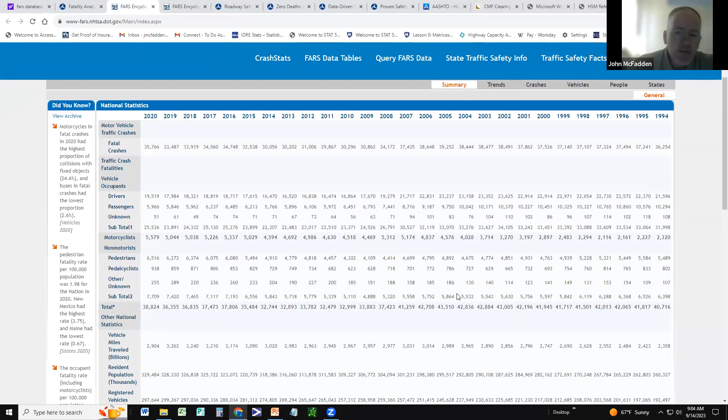Of particular interest here for me is what occurred in 2020. If you look, the first thing I'm highlighting here are the total number of fatal crashes, and then what's really more important are the total number of fatalities that resulted from those crashes.

So you'll see in 2020, highlighted there in blue, there were 38,824 deaths as a result of traffic crashes. The numbers themselves are astounding, and by definition, there's no acceptable number of fatals.

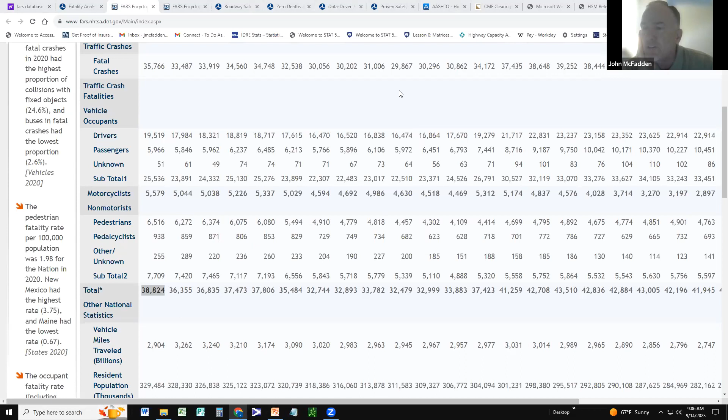But what really makes this discouraging is in 2020, as a result of COVID, the amount of VMT was drastically reduced. One of my thoughts as we were going through the COVID experience was, given that the country basically shut down, the world for that matter shut down, my expectation was we should have a drastic reduction in the number of deaths as a result of traffic crashes.

And yet what we saw was an actual increase from the prior year, 36,355 to 38,824. This led to and kind of accelerated the shift in how we deal with traffic safety, to deploy a new fundamental approach called the safe system approach, that I'll touch on as part of the presentation.

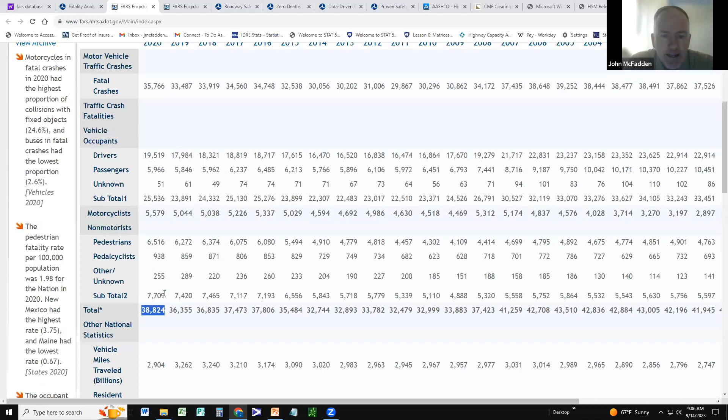But here are the national data, and you can track over the past 30 plus years. If you go back to, I remember back in 2010, 11, 12, after the financial collapse back in 2008, we saw a reduction in the number of fatals and reduction in exposure, that had me somewhat optimistic.

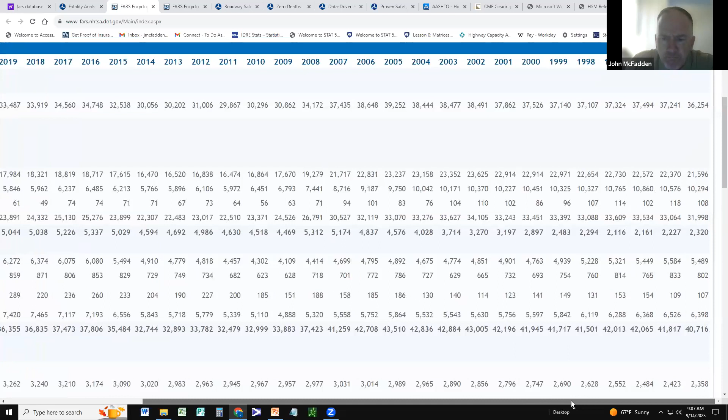We were seeing a reduction from 45,000 fatals, or I guess it was 43,510 back in 2005. We got down to 32,479 in 2011. And I've been with Fed Highway since 2001.

I felt like we were gaining momentum and having an impact on the reduction. But then what occurred was a slow migration back to the levels we were at prior. We haven't exceeded 40,000 yet, but it does represent an area of concern.

If we focus in on Florida specifically, you can go back to the FARS website, look under the states, click on the states, and you can find the Florida data. That's what led me to showing you this table.

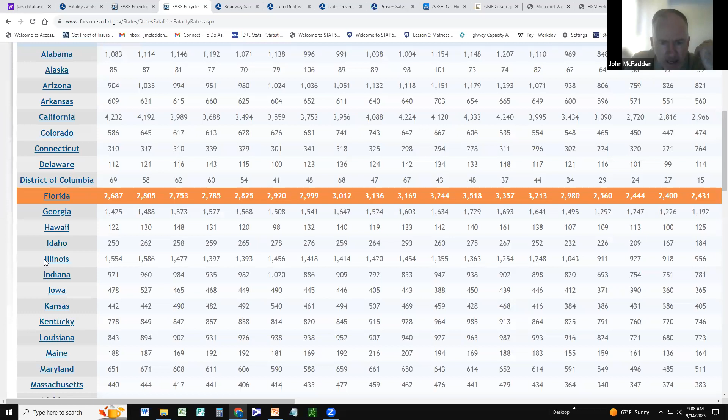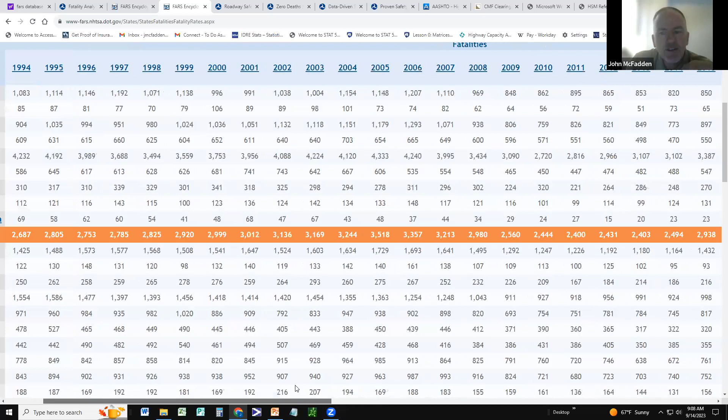You can see over the past 20, 30 years, going back as far as 1994, there were 2,687 fatals. In 2020, we're at 3,331 fatals.

So it feels like in Florida, on average each year, you're losing about 3,000 people as a result of traffic crashes. In past years, you can see Florida bottoming out in 2011 with 2,400. And then we saw the same movement as we've seen nationally.

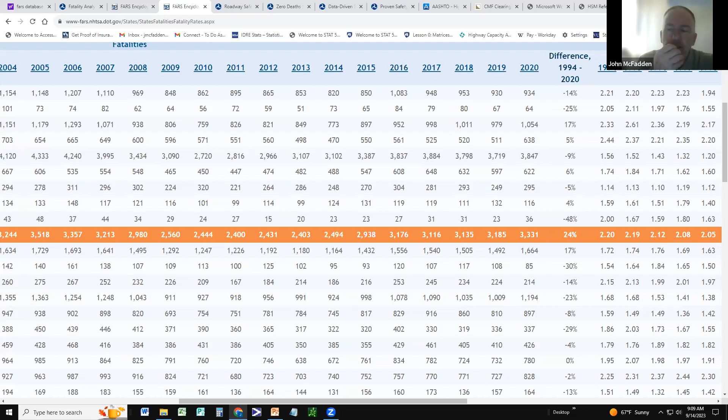With Fed Highway, I've gotten involved over the past 10 years in how to deploy data-driven tools to address this safety problem. That led me to want to share with you Federal Highway's data and analysis tool website. We have this site, the RSDP, our Roadway Safety Data Program, that provides a lot of information related to what we're going to cover today, tomorrow, and next Friday.

We do provide support related to deploying data-driven safety analysis. I was one of the co-leads for this Everyday Counts initiative, and as part of it, my role was to promote the deployment and use of data-driven analytics to help make more informed investment decisions about highway safety.

Within these sites, you'll see a bunch of different resources related to DDSA. I'm framing this before getting to the Highway Safety Manual, because the Highway Safety Manual is one tool that falls under the umbrella of data-driven safety analysis, and that's going to be the primary discussion topic over the next three lectures, today, tomorrow, and next Friday.

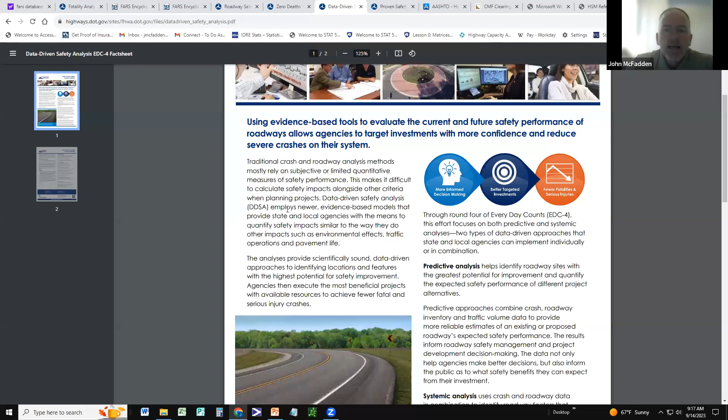And that finally leads me to the last website I wanted to share in the introductory part of this presentation, which reflects our proven safety countermeasures. These are different techniques that have been deployed and vetted, and the impact of these treatments has been quantified through typically crash modification factors that capture what impact installing or using these treatments or policy decisions will have in terms of the expected crashes reduced from the delivery of this.

You can see they're captured across different discipline areas: speed management, ped bikes, roadway departure, intersections, and then some cross-cutting countermeasures.

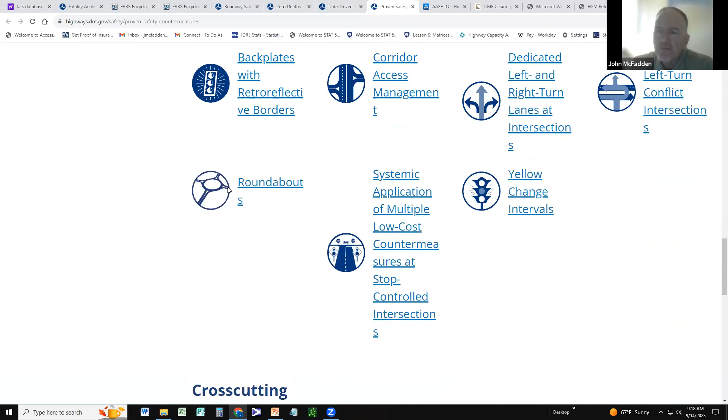The idea here is, given the fact that nationally we have limited resources within our jurisdictions, it's really incumbent upon us to make sure that when we select projects and designs or specific treatments for a project, we have a level of comfort with the expected return.

And that return is the number of crashes by severity that will be reduced given the investment that we have in each or any of these treatments that we would consider deploying. Without this knowledge, it's very difficult for us to be able to differentiate between what project and what design will yield the biggest return on investment.

It's not until the last 15 or so years where we have seen models developed that quantify the safety effects of design decisions, allowing us to now make comparisons across different designs to be able to select what combination of design and project yields the biggest expected return on our investment.

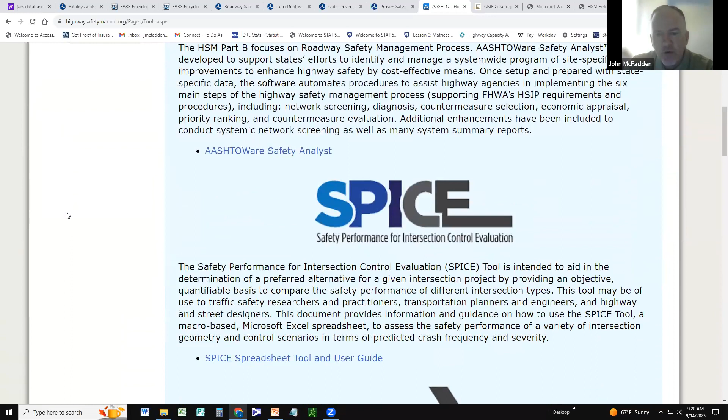The first major reference that you'll see I'll refer to throughout the day over the next 3 sessions is the highwaysafetymanual.org site. And within this site, you'll see under tools, there's a series of different software tools that are available for download that help us deploy these highway safety manual support software tools.

I'm going to focus on part C, the predictive methods, specifically these 4 Excel spreadsheets. For the purpose of today and as part of this workshop, we're focused on interchanges, freeways, ramps, and ramp junctions, which is the Enhanced Interchange Safety Analysis Tool, or ISAT-E, that I'll be using tomorrow to illustrate the content and application of this spreadsheet for data-driven safety analysis.

But I didn't want to move forward without mentioning that the HSM has the ability to predict crash frequencies for other facility types beyond freeways or full access control facilities. Specifically, you can do 2-lane rural highways, multi-lane rural highways, and urban/suburban roadways as well. The spreadsheets are all listed here.

You'll be getting an email from Taylor with a list of references to the specific research reports, whether NCHRP for the multi-lane rural, urban/suburban, and ISAT-E, or a Fed Highway report for 2-lane rural highways. That is the research behind what's in those spreadsheets, and it represents the chapters within the Highway Safety Manual.

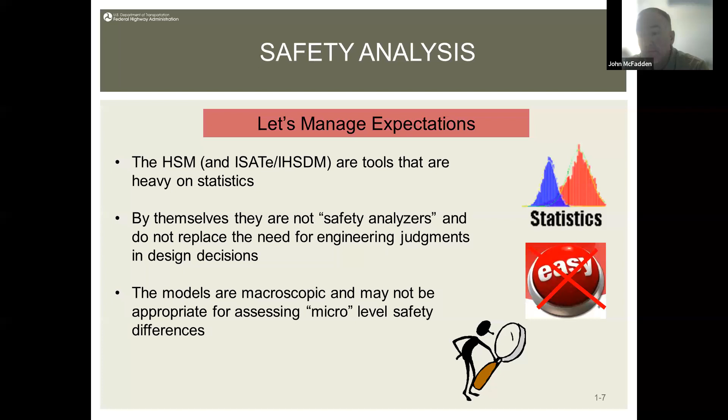Let me also suggest this: in November of 1985, a significant event occurred - the release of version 1.0 of Windows. It had a major shift in the impact it had on people's ability to use computers. Now, that first version wasn't an operating system, but it was more like a file share app before the apps that existed and as we currently know them. But it then evolved into a full operating system where everything is point and click.

I view that change in November of 1985, and the impact that's had on the computational world, similar to what we're dealing with in the safety community, specifically related to the release of the Highway Safety Manual in 2010. Namely, it changed the game with respect to how we analyze and deal with safety as it relates to our project development process, because we can now quantify expected safety benefits in terms of crashes reduced by type and severity for our projects.

In managing expectations with respect to this tool, I want to suggest that we are at version 1.0 of the Highway Safety Manual. The second edition is planned to be released within the next year and a half or so. Going back to the analogy of Windows in 1985, if I compare today's Windows 10 or 11 to that first version, you'd say these are two entirely different tools. I'd say the same about the Highway Safety Manual. Five to ten years from now, when we get to the second, third, and fourth edition, it will evolve and become more accurate and precise in quantifying the relationships between crash risk and design elements. The tool isn't perfect, but today it's the best model we have to explain the variability of crashes as a function of traffic volume and geometric design elements.

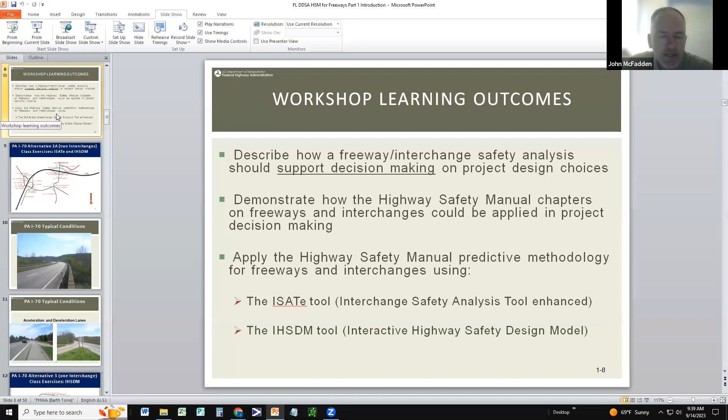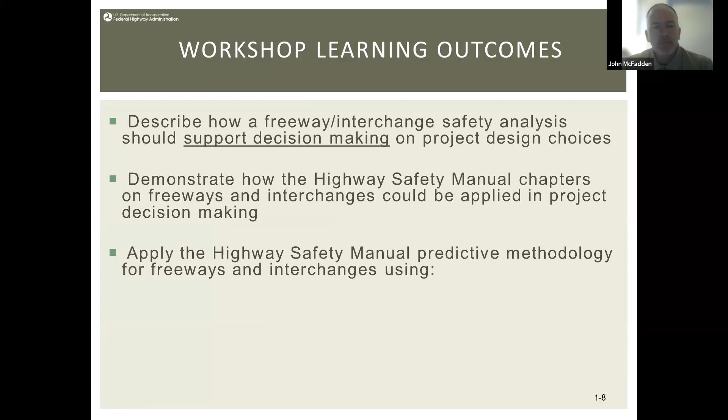We will look at how the Highway Safety Manual chapters on freeways and interchanges can be applied for the PDP and the predictive methodology, and apply that predictive methodology using ISAT-E as well as the IHSDM. Today we're going to talk generally about the theory behind this predictive methodology. Tomorrow we'll get into the application using the Excel spreadsheet, and then next Friday using the CAD-based interactive highway safety design model tool.

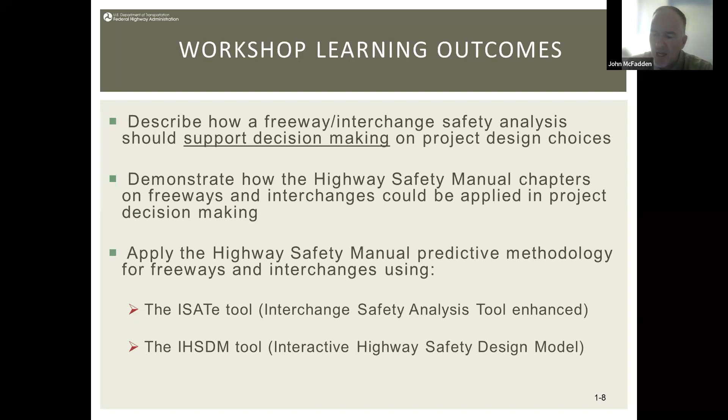The example that we typically use when delivering the workshop is shown here. It's a couple interchanges on Pennsylvania's I-70, where we reconfigure it to examine the effect of altering the current form of these interchanges and then estimating the safety effect of those changes. Here are a few pictures of that Interstate 70 in Pennsylvania, which is the focus of the examples we will deploy. It's got accel-decel lanes.

It's a 2-lane in each direction freeway facility, and there are a couple different alternatives that we will explore and analyze within the context of this workshop.

So today we're going to just get into the theory behind safety analysis for freeways and interchanges. Tomorrow we'll get into ISAT-E and the application of these theories using the Excel spreadsheet to that example I-70 in Pennsylvania. And next Friday we will do the same example using IHSDM and show you when it would be appropriate to use the Excel spreadsheet versus IHSDM.

As I mentioned before, there are very few absolutes. If you walk away from this workshop not remembering anything else, let me share with you what I say in every workshop: if you're ever in a public setting and presented with a challenging question about highway safety, the correct answer almost always is it depends.

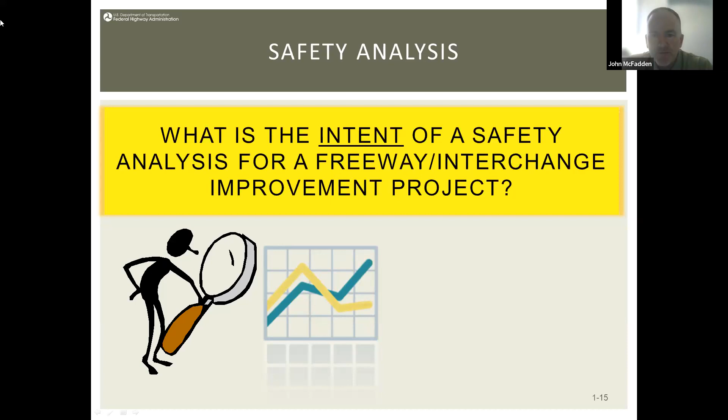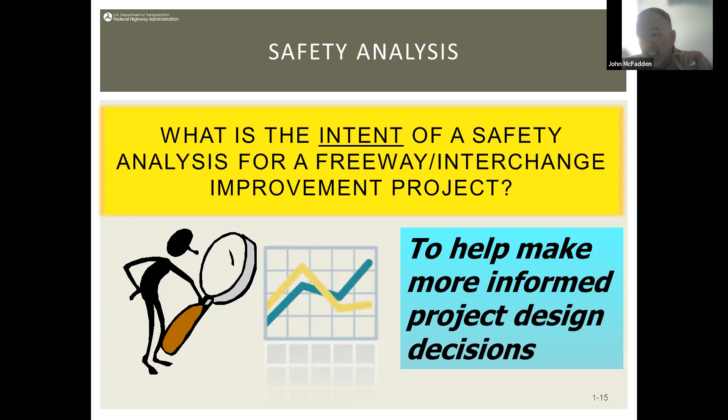So philosophically, the Highway Safety Manual provides us the ability to estimate expected impacts of design decisions on crash risk, through prediction of the number of crashes per year for different designs on different projects. Using that information, we can do exactly what Nash, John, and Adam Smith were discussing: identify the combination of project and design that will yield the biggest reduction in fatal and injury crashes for the money we have available. The overall goal is making more informed investment decisions by considering safety explicitly within the PDP.

So now, how do we incorporate this safety analysis in design? Some questions we want to ask ourselves: has the number and type of crashes at my project study site been, quote unquote, normal? And what is normal? If I'm sitting where you are, that's probably the question that would immediately come to mind—what is normal or acceptable? And that is a sensitive issue.

Many of you, working in public meetings, may have come across a scenario where you get two very pointed questions. One: how many people have to die at this location? And the second... how many people have to die? That question is difficult to answer, especially in a public setting. As an engineer, my reaction is that no fatalities are acceptable in my mind.

However, I'm operating in a position where I don't have unlimited resources. So what I have to do, in managing money for safety projects, is identify what combination of project and design will yield the largest reduction in fatal and serious injury crashes within my jurisdiction. Because of this limitation, we have to make hard choices. So how do I establish or identify sites that are operating at an acceptable versus unacceptable level? I'm using that term 'acceptable' more from a statistical side than a public relations side, because no fatal or serious injury crash, or crash altogether, is truly acceptable.

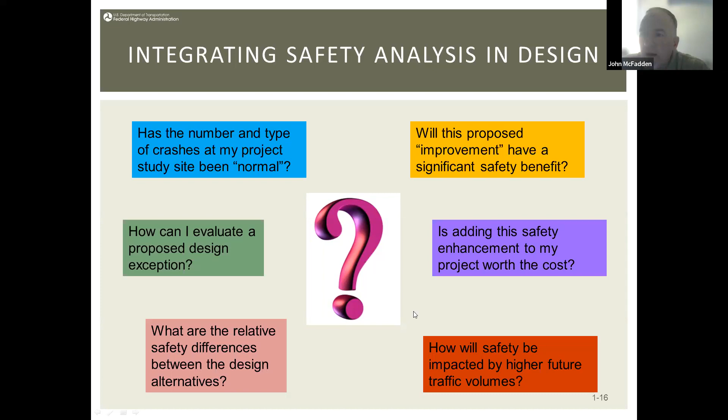Typically the criteria is based on the scale and scope of the project. So I encourage you, as you start to dip your toe in the water of highway safety analysis and learn these different procedures, if they're new to you, leverage all the information that's out there. You do not have to feel like you're reinventing or starting from scratch. In fact, there has been about 10 to 15 years worth of work done to ease that transition into the use of DDSA within our projects.

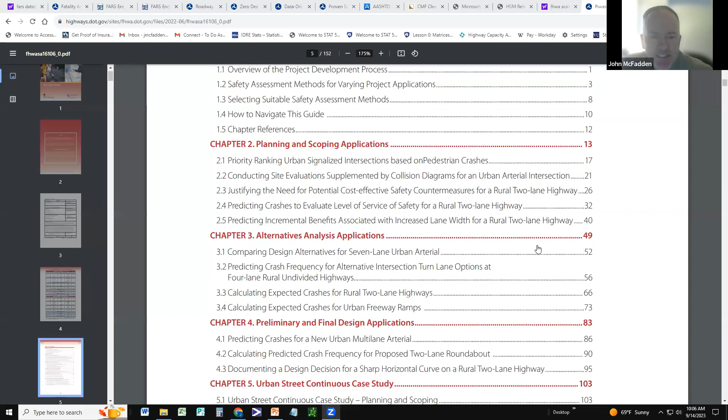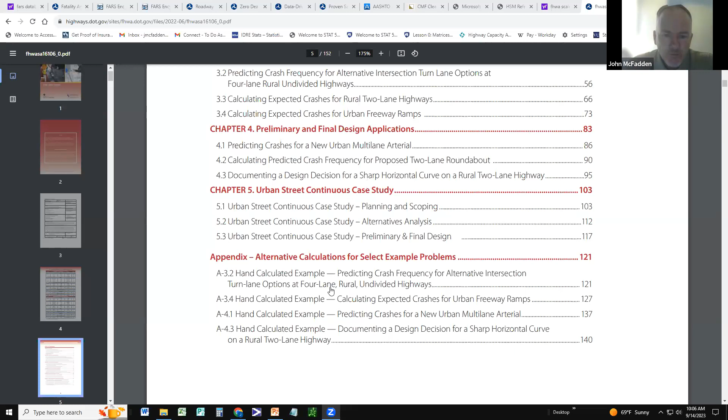As you can see within the table of contents here, it provides specific analytical approaches as well as their application to projects across different facility types, and provides guidance on when and where to use one safety assessment method versus another. Again, that reference report is the Scale and Scope of Safety Assessment Methods in the PDP, or project development process.

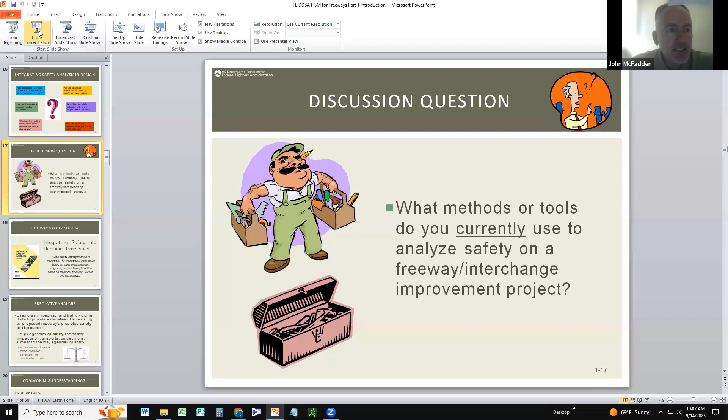All right, let me get back to the script for a moment here. So that is directly linked to this question that I wanted to pose. If you could, in the chat pod, take a moment and answer: what methods or tools do you currently use to analyze safety on a freeway or interchange improvement project, or if that's outside your scope, any non-freeway facility as well? What current methodologies are you deploying? And especially, if there are any data-driven analytical approaches, what tools or techniques have you deployed?

I'll just segue for a moment to the chat pod to see if you could type in your answer, as I wanted to get a feel for whether you own the Highway Safety Manual, also acknowledge that in the chat pod. If you don't have a copy of it, I would hope that the references I share, which you'll get in the email, will also assist you with that. But if you have any experiences, please share what techniques you're currently using for safety analysis, if any.

I'm not seeing any comments in there, and I'll leave the chat pod open as I continue. But my expectation is that Florida, like many other states, there's some variability that exists throughout the country in the deployment of DDSA. Some states have taken a more active role, others have kind of taken a wait-and-see approach with it. Wherever you are with respect to your jurisdiction, I think it's an area of opportunity to both deploy and improve upon the current protocol for incorporating DDSA within our projects, specifically PDP.

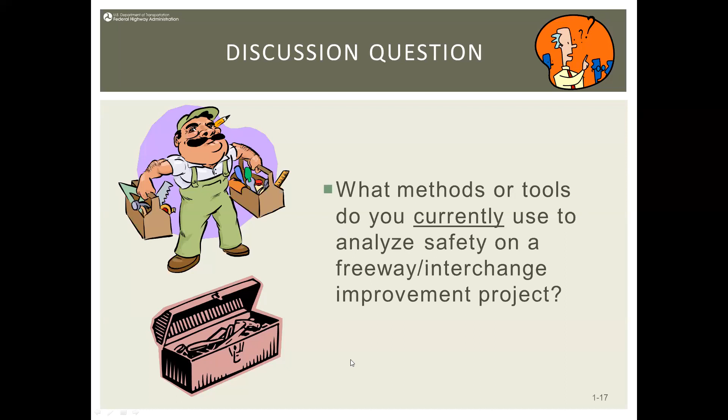I was just going to acknowledge that you did receive a response to your discussion question in the chat or in the Q&A panel, that there's no, not currently being used, the HSM manual just yet.

Yeah, thank you, Taylor. And that's okay. In fact, when I initially started selling the HSM, and when I say sell, I feel like I'm a bit of a traveling salesperson. I go around the country identifying what it can do, what it can't do, when it's appropriate for use. And one of the key elements here, if you think about what's occurring within the HSM, as we'll see in the next slide or two, is this idea that we have a national model predicting safety performance for different facility types.

Now, in many states, they have their own state design manual. It's my expectation that the Highway Safety Manual is going to follow suit in this way. These state design manuals basically allow states to adapt design criteria to reflect the local conditions within their state that are relevant. So in many cases, what you'll see is the state says, okay, we're going to follow the AASHTO Green Book guidelines, except for these scenarios.

A good example is super elevation. If I'm in Hawaii versus Alaska, the super elevation criteria should differ, right? There's no ice or snow in Hawaii like there is in Alaska. So I could see going up to a super elevation max of 0.12, whereas in Alaska it might be 0.04 max super. This is the type of example that's relevant within safety prediction models.

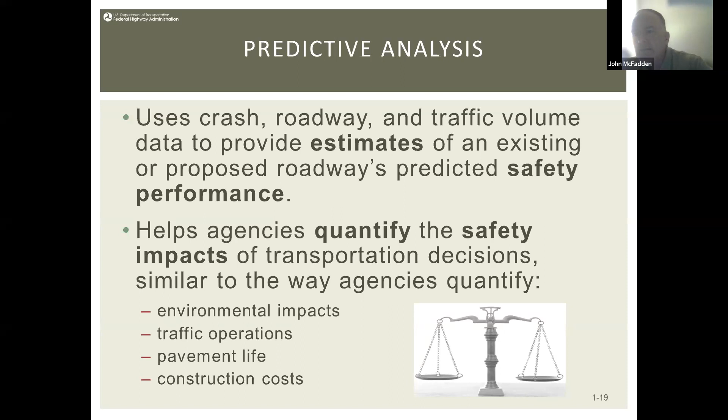In my mind, it gives safety a voice so that we can now incorporate safety explicitly into the PDP by setting it up as one of the stakeholder values and quantifying the benefit and cost associated with remedies focused on reducing the number of crashes by severity on a facility.

It is a key component to this process. In fact, we label this as a nominal safety check for our projects. I'd expect that for every project you work on, we'd deploy an examination of the project design elements to see if they're in compliance with standards. If they are not, that doesn't necessarily mean we need to bring this project to the top of the list to recommend compliance. But because we have limited resources, we'd want to examine whether there's a substantive safety deficiency at these sites resulting from non-compliance with standards.

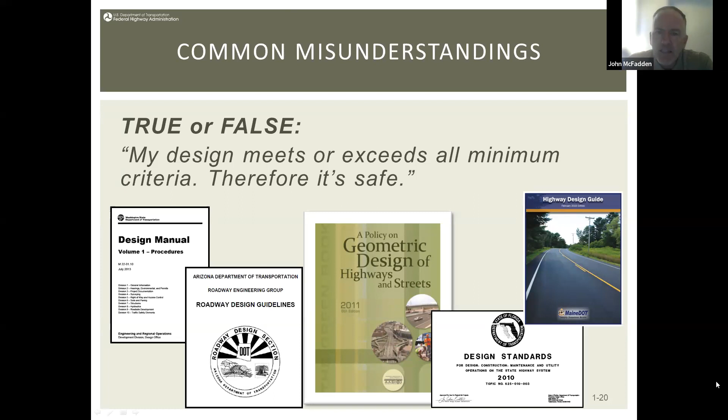We have the analytical side where we're examining the project design elements from the perspective of compliance with standards. And on the other side, we're examining the historical performance of this project, if it's an existing project or site, in terms of actual crash performance or predicted crash performance for a site with these conditions.

Now this world of nominal versus substantive safety is something that I think is a temporary phenomenon. What I mean by that is it's my expectation that as our models quantifying the relationship between design elements and crash risk improve, you're going to see these two concepts combined together when we establish and set performance-based design standards.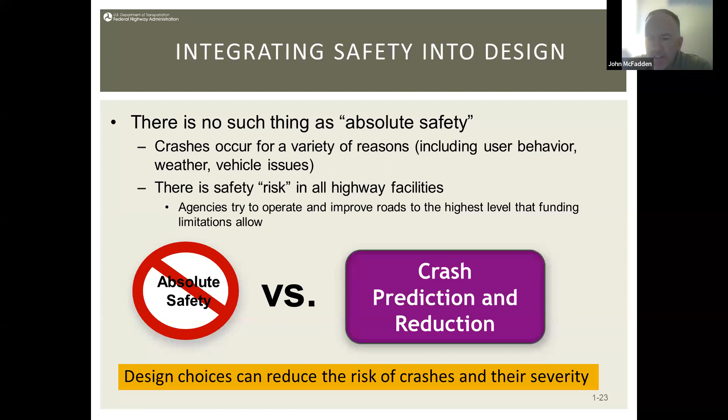And that's our focus here: reducing the risk of crashes and severity.

I'm probably preaching to the choir here, and I'm pretty sure you're all aware of this, but good design is more than just looking up values from a reference in design standards—it's deploying engineering knowledge and an understanding of the relationships between our design elements and the crash risk associated with them. We are in the business of managing risk and maximizing return on investment—hence that analogy I made. We are risk management engineers and financial advisors for the investment of public funds.

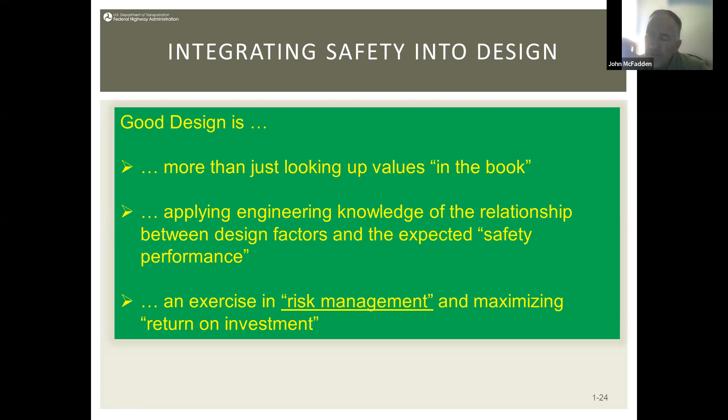What I foresee in future editions of the Green Book, as well as state design standards, is the adoption of performance-based standards which merge both substantive and nominal safety together, so you have one continuum that reflects optimal scenarios for the context of your project. Sometimes it may not be feasible to achieve the highest level of performance standard for a project, given some site constraints or limitations in resources.

At that point, we have to optimize the project given the context of that project, which includes resources that are available right away, so on and so forth. I can see this becoming, for each unique project, a specific optimal performance design available to us given the constraints of that project. So you may see a day where each project has its own unique performance-based standard based on the context of that project. Philosophically, that's where I see this road leading us.

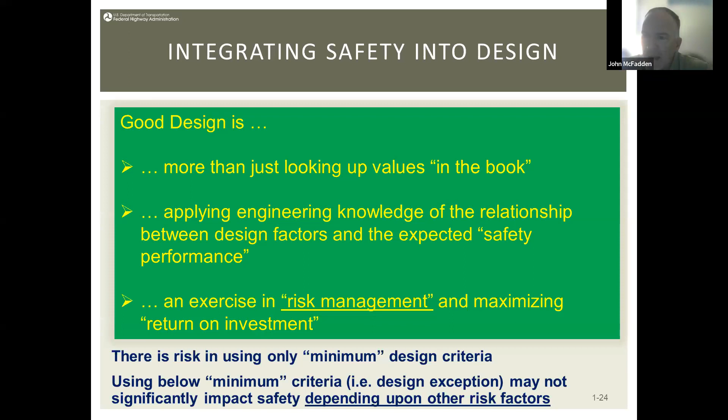The issue here is we are at version 1.0 of the safety manual, which at this point doesn't allow for the level of nuance that's necessary to achieve what I just described. But that's the path we're heading down by improving, building, and expanding these models.

Okay, here's another question. A safety analysis is a table summarizing the safety data or the crash data from the past few years. As a true and false question, I'd say this is one form of safety analysis—it includes an examination of crash history data for your site, but it's not all inclusive. This may be one key component of our safety analysis, and it provides insights of the substantive safety record for a project. But as you'll find out as we deploy these procedures over the next tomorrow and next week, there's a little more to it than just looking at historical data to make decisions about future path.

We use these data in combination with models to make projections about what will occur into the future for this project if we do nothing versus if we make some design changes to that site.

Now, in the Highway Safety Manual, they use three terms for crashes. The first is observed, and what you see here is a good example of the observed crash history for a project. The second is predicted. Predicted crashes are those crashes, or the number of crashes, that the Highway Safety Manual or some other analytical tool that predicts crashes yields for our project.

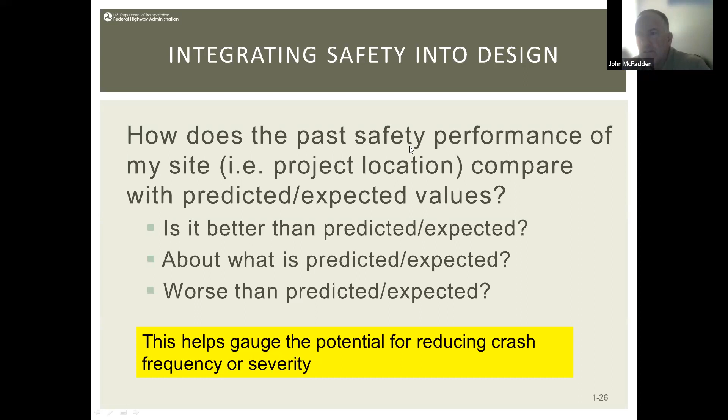So these are the ideas and metrics that leverage data to help make and change policy related to our design elements.

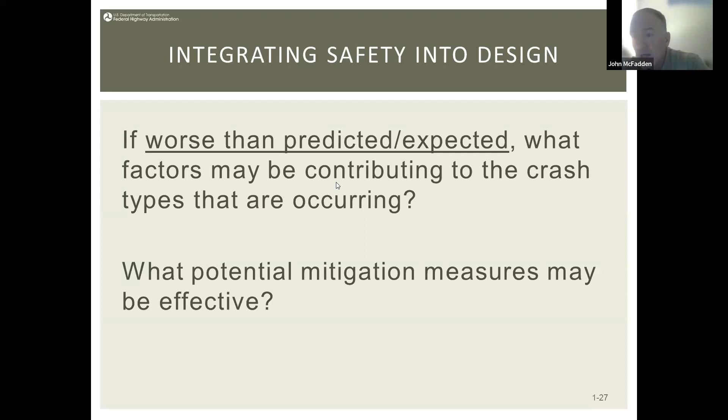Bringing this further into a practical application, in the scenario where our observed crash history is worse than what we would expect, we need to deploy our engineering analysis. What are the factors in the right-of-way within our design that may be contributory factors relating to that over-representation of crashes at this location? With that in mind, we focus on how to mitigate or address that difference between observed performance and what we would expect a site with these attributes to perform at.

And then once we've gotten to that point, this is where the Adam Smith, John Nash, beautiful mind economic theory comes into play. Because we have a variety of investment opportunities within our jurisdiction - at the 100 or so potential safety projects each year, I'm making up that number - what we want to do is evaluate each of these and quantify the benefit cost associated with each project. In doing so, we identify the combination of project and design that will yield the biggest reduction in fatal and injury crashes within our jurisdiction. We do this systematically year over year. It is the optimal approach to saving the most lives and injuries given the resources available to us.

So we use this economic appraisal tool as part of our project selection process, our PDP project development process, and also our final design procedures.

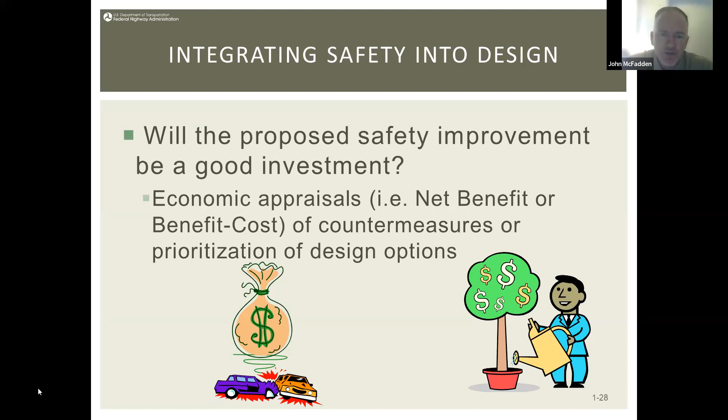Here's an example of some different alternatives for a project. As an economic evaluation tool to assess the safety benefit, what we want to do typically is convert the change in operations into a present value benefit, and convert the change in crashes into a present value benefit. We construct or calculate the construction costs, and then obtain a net present value for our costs that is used to establish a benefit cost ratio. For this example, you see a variety of different alternatives, A through D, showing the present value of the benefits, the present value of the costs, the net present value for the project, and the benefit cost ratio.

Now it may be a pointed question of which of these different alternatives we would identify as our preferred alternative, and the answer is it depends. If the criteria is net present value, it would be alternative B. If the criteria we want to use is BC ratio, then it would probably be alternative A. But it's a data-driven procedure by which we select the alternative of interest for our specific project.

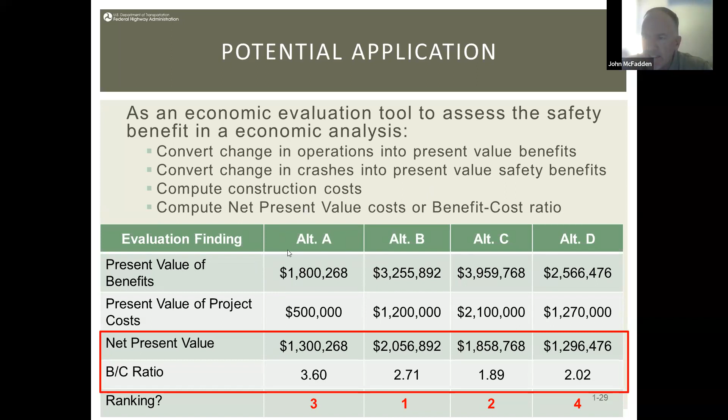Now, they may differ geographically across the country based on location, as too do construction costs vary. So constructing a mile of highway in Manhattan versus Montana are likely going to yield different costs. So the crash costs and the construction costs need to be accordingly reflective of the local jurisdiction and values associated with that. There are guidelines, and I'll pull that report up after the next break and share with you the crash cost histories for the purpose of doing this type of highway infrastructure project safety evaluation.

It's a great question. So what these tools allow us to do is, for example, for the variety of design options that are shown here, is quantify the safety implications of those different designs and quantify the benefit or cost associated with these different designs to bring them back to a common metric, which is BC ratio or net present value of the benefits, so that we can then make the difficult choice of identifying which projects will be funded versus those that are going to be put off until some future year because they do not yield the highest level of return on investment that we're using as our criteria.

Okay, so now I'm going to jump into the crash prediction methodologies. I've done a lot of broad discussion over the topics. As I mentioned before, the initial release had 3 facility types: 2-lane rural, multi-lane rural, urban, suburban. And in 2014, the supplement that we're going to be covering as a part of this workshop on freeways, ramps, ramp junctions was published.

Now, let's start with the safety performance functions. These safety performance functions are nonlinear regression models typically that are predicting crashes based on exposure. So AADT is a common predictor, and for segments, segment length is another exposure element that's used to predict the number of crashes per year by these safety performance functions. And they were developed for a number of similar sites for a given set of specific base conditions. Typically the predictor variable for an SPF is ADT, and for segments, segment length. For intersections, it's ADT for the major and minor approach. So you have 2 ADT values as the predictor variables.

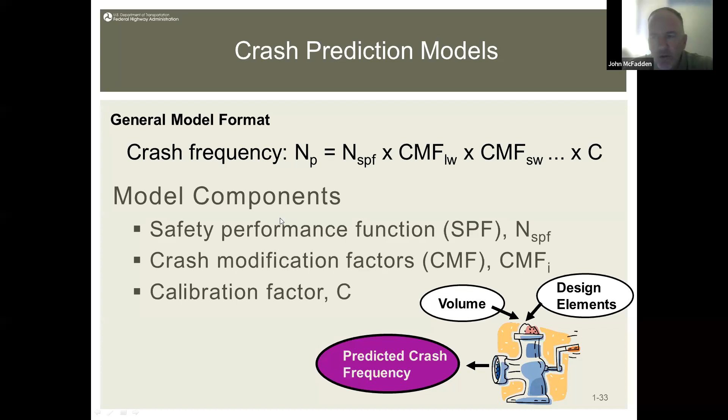So great question, I hate to punt it, but it is relevant to this workshop. It's a bit outside the scope because we're not going to be analyzing ped and bike crashes here, except at the ramp terminals, which I'll touch on a little bit. But I will also suggest that one area of opportunity for improvement in the first edition of the HSM is ped and bike crash predictions.

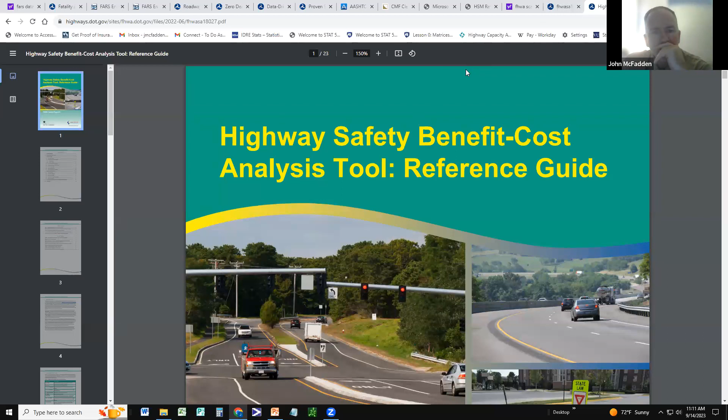What you'll find within this reference, much like that scale and scope guide, is a tool written for practitioners that shows you with examples how to conduct benefit cost analysis. It provides some examples of crash cost by crash severity level, and that's what I wanted to segue to in a moment, just to give you an illustrative example of how it presents those costs.

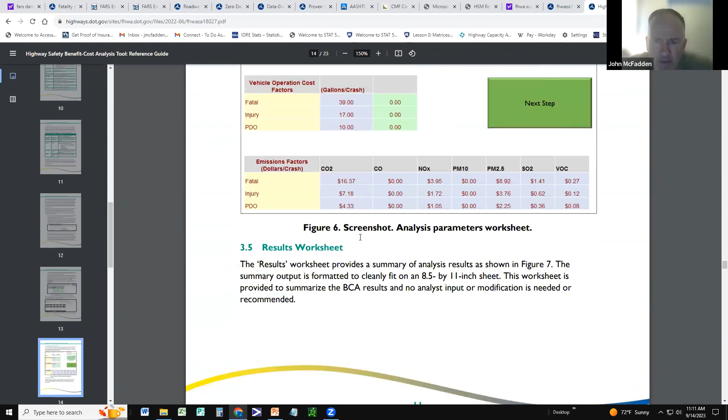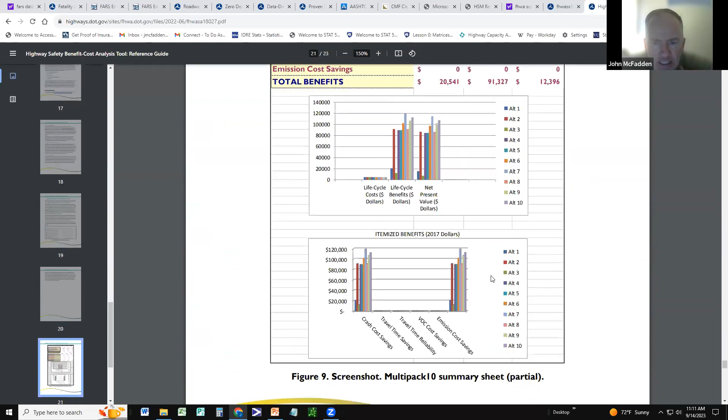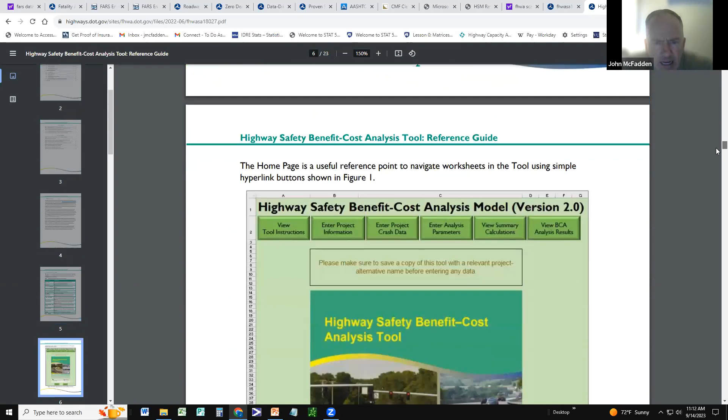So if you just bear with me, in this report it gives me a table showing crash cost by... I'm looking for it... okay. Oh, and we have this highway safety benefit cost analysis model as well. I want to make sure I got that, so that's for the actual analysis tool.

Here, from our RSDP under tools, is the highway safety benefit cost analysis guide. The tool itself, the software tool, you can also download from this site. And this crash cost for highway safety analysis reference provides the list of crash costs by crash severities. It's in the table of contents, and you can see the breakdown there.

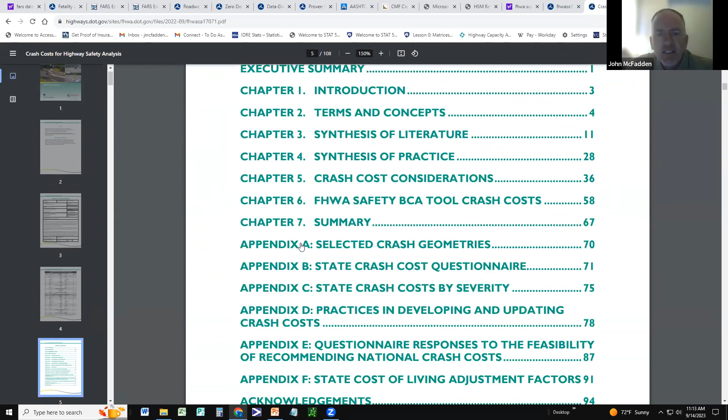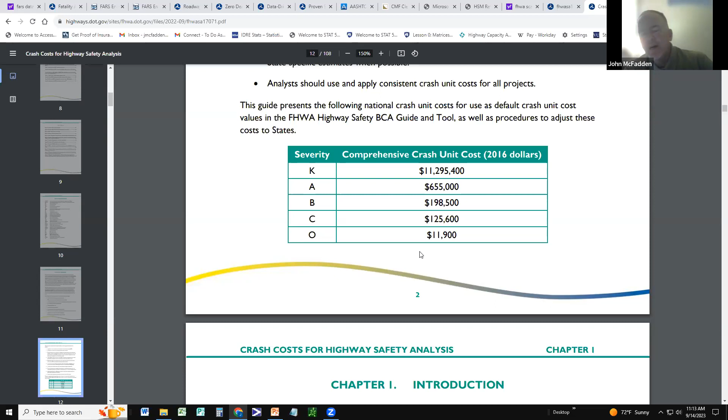There's a synthesis of practice, and then it goes through and shows certain examples of that. If I go... let me get to that table. There's an example: in 2016 dollars nationally, using the KABCO scale, the unit costs per crash by severity. You can update that to reflect changes due to inflation, and each year these values are updated. NHTSA did the initial study, I think in 1994, and each year it gets updated to reflect the impact of inflation.

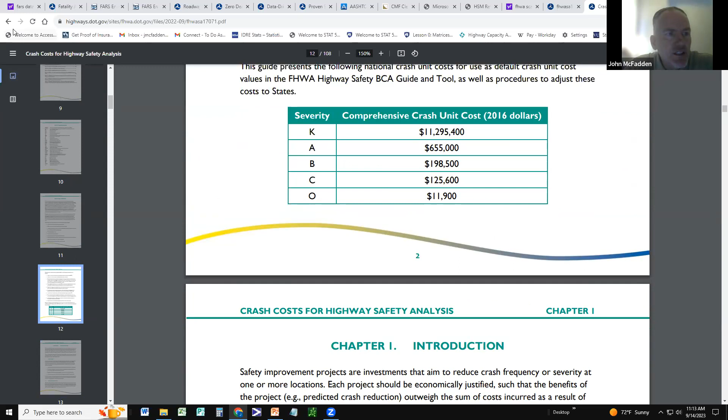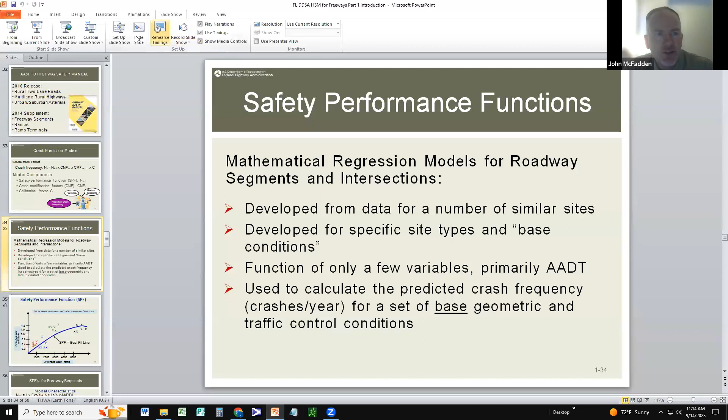So I encourage you, if that's an area you're considering, under the roadway safety data program tools you'll see the crash benefit cost analysis guide, the analysis tool, and the crash costs for highway safety analysis reference material that can help you through this process. They also show examples of how to deploy it.

Okay, just coming back to the script, where we left off was a discussion on safety performance functions. We develop a safety performance function through the collection of data, both traffic volume and crash performance, typically with crashes measured per year. In the initial version these are total crashes, but as research matures and data quality improves, we're starting to see more SPFs broken down by crash type and crash severity for each facility type.

So instead of predicting total crashes, we now see models that predict PDO versus fatal and injury crashes. We can then use default distributions to break those up into the KABCO scale, if we want to apply it to the crash cost analysis guideline criteria I showed before.

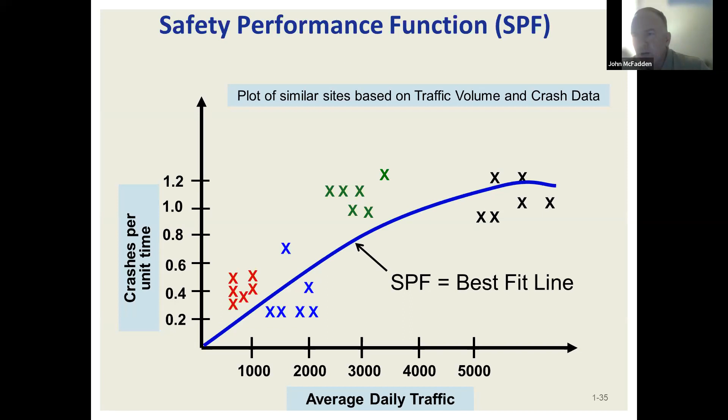Generally what we're doing is fitting the best fit line, or in this case a nonlinear function, to our crash data with traffic volume as the predictor variable. For every facility type, and within a facility type any other fundamental criteria we'd differentiate by, such as area type, we'd have different models to reflect that.

The model form traditionally is the same as illustrated here, and I want to apologize in advance: with the publication of the Highway Safety Manual, we introduced a whole new suite of acronyms to our discipline. N sub SPF reflects the number of crashes predicted using the safety performance function, and here it's a function of the segment length for our freeway facility. You have the coefficients of the model A, B, and C, and the predictor variable is ADT. So for freeway segments, the safety performance function predictor variables are the length of the segment as well as the ADT on that segment.

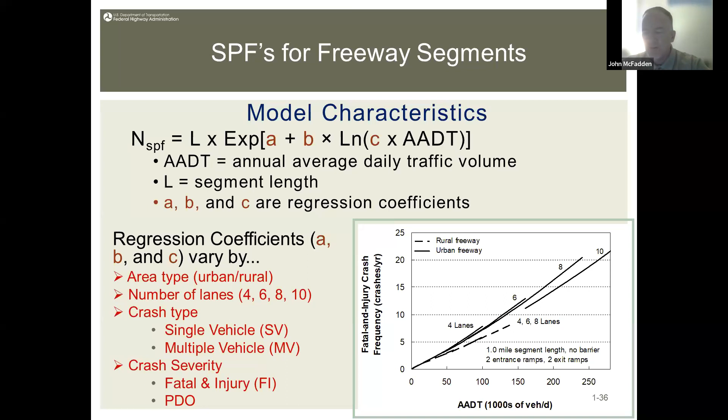Now, what you also notice here is this model is predicting fatal and injury crashes. So this becomes like one huge tree diagram, meaning you have SPFs for urban versus rural, based on the number of lanes of the freeway, based on what severity of crash we're predicting. And once you start to examine how many different combinations of number of lanes, area type, crash type, crash severity that we're predicting for, it really increases or inflates the number of SPFs needed. So this is constantly growing.

In applying this concept, you'll notice that the first breakup is urban versus rural. The criteria for this is the population. It uses the Green Book criteria of rural areas, or areas with boundaries outside of urban areas, where the population is less than 5,000. Urban is populations greater than 5,000.

I would argue that there's an 'it depends' when it comes to area type. In fact, the most recent edition, the 7th edition of the Green Book, incorporated into Chapter 1 the NCHRP study that expanded area type beyond the binary rural versus urban. Now, within rural, there's two groups: rural town center versus rural non-town center. And then urban, there's three categories: an urban core, suburban, and something in between, transitionary. So now we have 5 area types as a result of the most recent NCHRP study that was adopted by the AASHTO Green Book.

Now you may ask, well, what impact does that have on models that were developed prior to the release of this NCHRP study? It's a great question. At this point in time, with the current edition of the HSM, it does not reflect that new research, so we are stuck with this binary world. But the expectation with the second edition of the safety manual is they will start to examine and incorporate the nuance of those 5 categories of area type, as opposed to this 2 binary world that exists in the first edition.

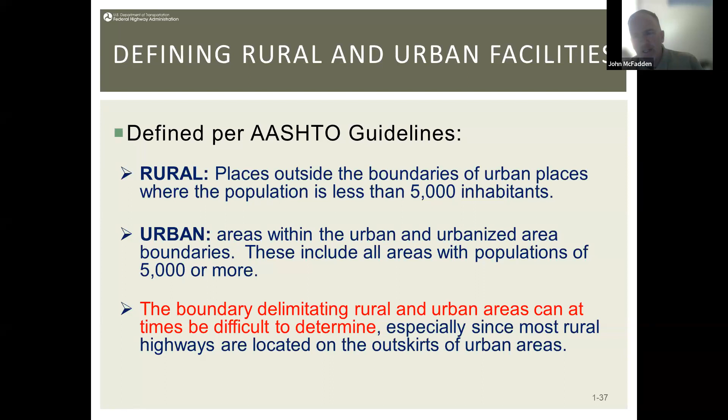And there's some cases where it's difficult to differentiate urban from rural, especially when you're in transitionary periods or areas on the outskirts of urban areas. So for our freeway facilities, the SPF for the base conditions captures many different combinations illustrated here.

So when we look at the total number of SPFs that are in the first edition of the Highway Safety Manual for freeways, ramps, and ramp junctions, you can see as it relates to this slide, there are 132 total SPFs. We have 28 for freeway segments, 18 for freeway speed change lanes, 24 for ramps, 6 for CD roads, 40 for signalized ramp terminals, and 16 for stop control ramp terminals.

So this slide kind of captures the complexity of the Highway Safety Manual as applied to freeway analysis.

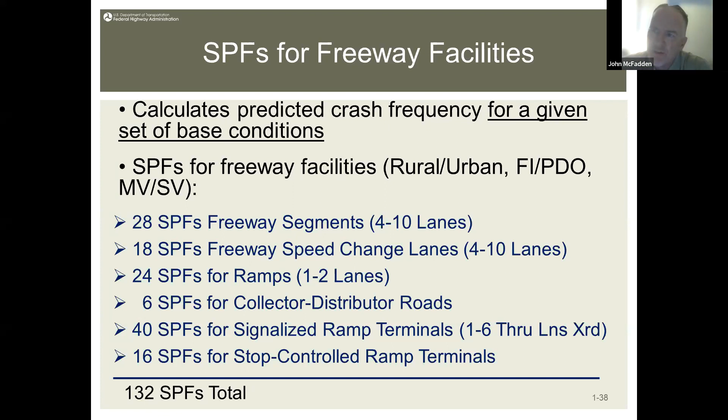If we compare that to two-lane rural highways, for example, there are maybe 5 or 6 total SPFs used. You have the segments, the intersections, and then within the intersections there are 4 or 5 different combinations. That's why, as I mentioned earlier, we can get through two-lane rural, multi-lane rural, urban, suburban roadways in a day and a half. And then it takes us another day and a half to get through freeways, ramps, and ramp junctions, and sometimes even more than that, 2 to 3 days. We do workshops of 2 to 3 days simply on freeways, ramps, and ramp junctions because of the complexity of the research involved in this facility type.

Okay, so now let's examine the base conditions. As you recall from the earlier slide, the 3 components of the predictive methods for the Highway Safety Manual are the SPF predicted, the CMFs, and the calibration factor. Well, we showed the SPF, and now we're going to show the base conditions that are linked to those SPF models.

So these base conditions for the safety performance functions are rooted in geometric or traffic control attributes. They don't necessarily reflect a recommended feature or attribute, but rather a common attribute that was found when developing the models themselves. For instance, 12-foot wide through lanes, 30-foot clear zones, permissive left turns at signalized terminals. These are examples of common attributes when dealing with these sites in the development of the models, established as the base conditions.

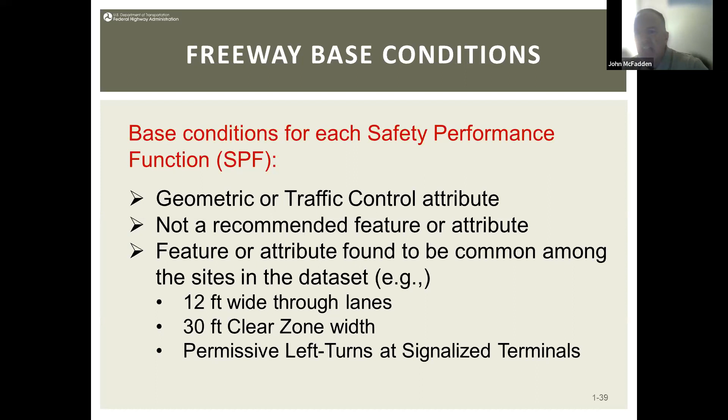So what is a CMF? In the Highway Capacity Manual, we call these adjustment factors.

In an effort not to make this any more confusing than it has to be, when you see the publication of the 2nd edition of the Highway Safety Manual, you're going to see one specific change: in Part C, the predictive methods, they are going to rename the CMFs that are associated with Part C, which are linked to the SPFs. They're going to call them adjustment factors in the 2nd edition, to be consistent with what the Highway Capacity Manual uses. The reason being, Part D of the Highway Safety Manual's 1st edition has CMFs that aren't related to the Part C CMFs.

For the predictive methods, when they initially develop them, they develop the SPF, linked to a set of base conditions, and then for those base conditions, for the same sites, they develop CMFs for lane width, shoulder width, and so on. Those CMFs, which are going to be called adjustment factors in the 2nd edition for Part C predictive methods, are different than the CMFs in Part D in the 1st edition. The CMFs in Part D were independent research studies that aren't linked to any SPF from Part C, based on research conducted on different treatments that we could then pull into Part C.

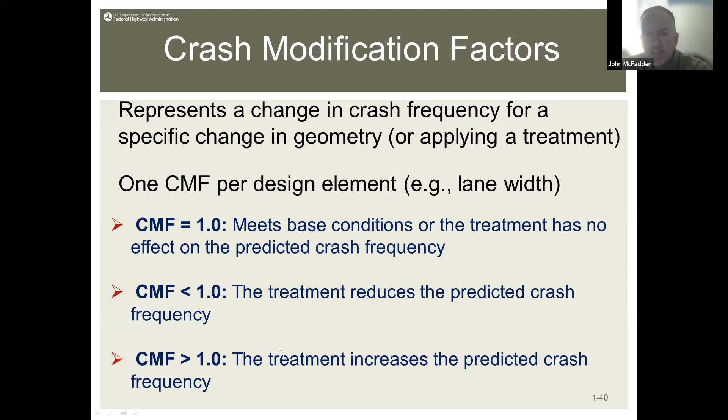And then Giddy mentions: John, are there SPFs for yield-controlled ramp terminals? Interchange improvements we often see involve yield-controlled movements change to signal control. It's a good question, Giddy. The set of SPFs is not comprehensive for every possible scenario, and we will get to the conditions tomorrow that it's applicable towards. Great question.

Okay, so let's take a look now for freeway segments. Let's take a look at the CMFs that exist. These are used to adjust the SPF predicted values to actual or proposed conditions that we're considering.

So for the base geometric and/or traffic controlled conditions, for freeways we have 13 CMFs. For ramps, we have 9. And for crossroad ramp terminals, we have 11 CMFs.

What's not mentioned on this slide is this is not done for a specific project, but rather what has to be conducted here is a research study where you randomly select, for instance, 30 freeway segments that have varying segment lengths from at least 1/10 of a mile up to about a mile long, somewhere in that range, where you have 30 sites randomly selected with at least 100 total crashes.

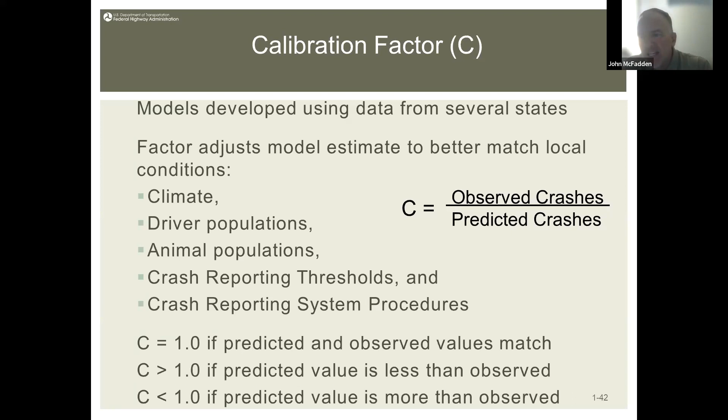Typically, what we're more concerned about is the scenario where we have 3 or 4 years of unusually high crashes, where it comes to our desk and on our radar as a problem site. What we're trying to account for and focus on is investing in projects where the changes we make have a direct impact on reducing the crashes, as compared to the problem of investing in a site where the treatment is not going to influence a reduction in crashes. It just experienced, by random nature of crashes themselves, an unusually high 3 or 4 year period.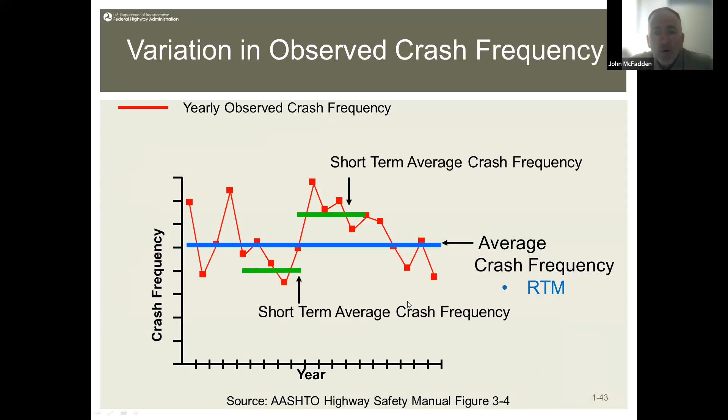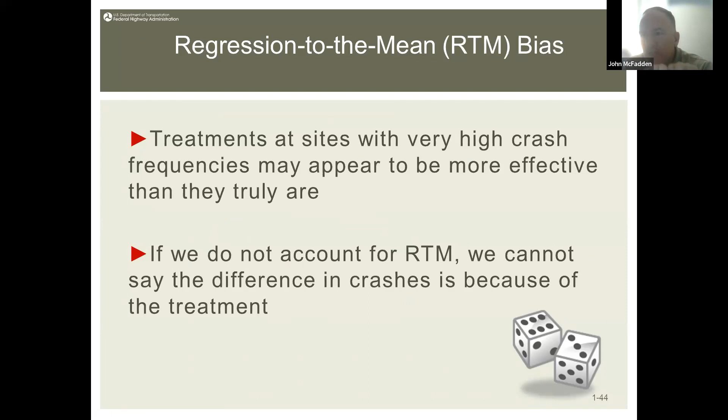So to control for that regression to the mean, which is what we call that, we can deploy some statistical approaches to address it. That's where the use of the observed crash history in combination with the predicted model performance together using a weighting structure through empirical Bayes is, to date, the best approach to address this regression to the mean effect.

And why is this important? Well, let's consider the scenario where I'm trying to evaluate the effectiveness of a treatment. So for some reason, I used the short-term trend of an unusual 3-period peak to assess the effect of a treatment.

So I used this high watermark of crashes as the benchmark or baseline for which I estimated the long-term average. I applied a treatment that year and then evaluated the effect of that treatment to be the low watermark shown here, which gave me a perceived effectiveness of that treatment that overrepresents the impact because it accounts for and includes the regression to the mean effect for that treatment.

So had we done nothing, the long-term average of crashes would have regressed down to the blue line, where the true impact of that treatment is the difference between that long-term average and the new long-term average for the site.

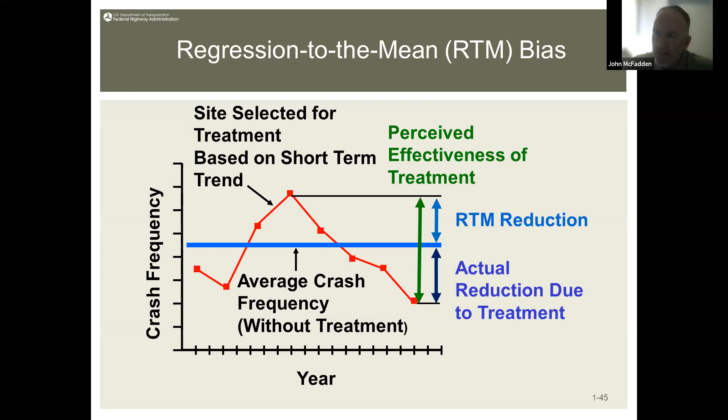So this is, again, at the core why addressing the regression to the mean bias is important, especially when quantifying the effects of certain treatments we put out there through the development of CMFs, or crash modification factors. If we don't account for that RTM, we may be overestimating the benefits of a potential countermeasure we deploy.

So how do we deploy this EB adjustment? In essence, what we're doing is taking the 3-year crash average, observed crash history for the site, and in combination with that, the predicted crash performance for that site, together using a weighting structure. When we combine observed to predicted, we get the third term in the HSM for crashes called expected.

And this is how, generally speaking, it would look visually. You can see on the SPF, we have the predicted crashes. So for instance, for a given ADT on a freeway lane or freeway facility, that segment, given that ADT under a set of conditions, would experience or predict this average number of crashes.

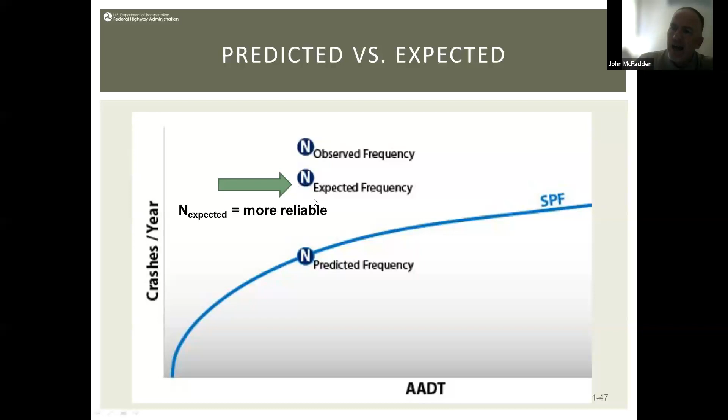Our site may have experienced this observed crash performance over the last 3 years. To address the regression to the mean phenomenon, what we do is apply a weight associated with the observed crash history and apply 1 minus that weight to the predicted, and then combine those two to come up with an expected crash frequency, which is a more reliable estimate of the long-term average.

Okay, so going back to that scale and scope document of safety assessment methods, you may say to yourself, well, I want to use EB whenever I can, because it's a more accurate representation of that long-term average when evaluating either changes that are resulting from future design that I'm considering, or evaluating for a specific one project versus another, which is more worthy of funding.

There are certain conditions necessary for you to be able to deploy the empirical Bayes. First, if it's a new facility, I have no crash history, so I have no observed crashes for the site. I can't use EB because I don't have the observed crash history. So if it's a new design or a new roadway, that eliminates the possibility of using EB.

On the flip side, if there's no SPF or predictive method for the facility type we're examining, and I do have observed crash history, I can't use EB because I can't get the predictive estimate for that.

On top of that, for cases where I do have observed crash history and there is an SPF, we can apply EB if there are no substantive changes to the roadway geometrics and traffic control. Meaning I'm not going from unsignalized to a signalized intersection. Anytime from the before to the after you're shifting out of the facility type we're using to predict, it renders EB not applicable. Why? Because the observed crash history for that facility when it was an unsignalized intersection is not relevant to the change we're making as a signalized intersection.

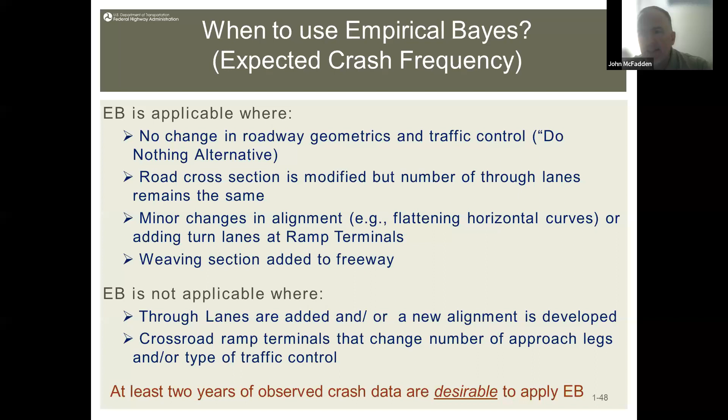Within the Highway Safety Manual, there's a flow chart of the process we'll walk through, and we'll get into this a little bit more tomorrow. I'm going to jump off.

Arturo had a question here in the Q&A: have the crash forecasting tools been used to do backcasts that are then compared to actual historical data?

Great question. I view this as validation. Typically once we finish a project, we put it on a shelf and move on to the next fire that comes across our desk. I think there's value in going back. These models are kind of like plants or pets — they need to be fed, in this case fed data. They need to be modified to adjust and address changes that exist within our infrastructure. So every so often you want to do an evaluation to validate or vet the models to make sure they're an accurate reflection of the current relationship between driver, vehicle, and roadway interrelationships.

So what you're describing in terms of backcasting is an appropriate methodology in the life of this DDSA for a jurisdiction. It involves an iterative procedure where we're constantly updating and evaluating the validity of existing models. This is why DDSA is a never-ending process — well, I guess it will end once we get to a point where our vehicle fleet and roadway infrastructure are lined with widgets and monitors evaluating performance of both drivers and the roadway infrastructure and assets, so that as long as you're complying with a set of driver conditions, you have free reign to operate.

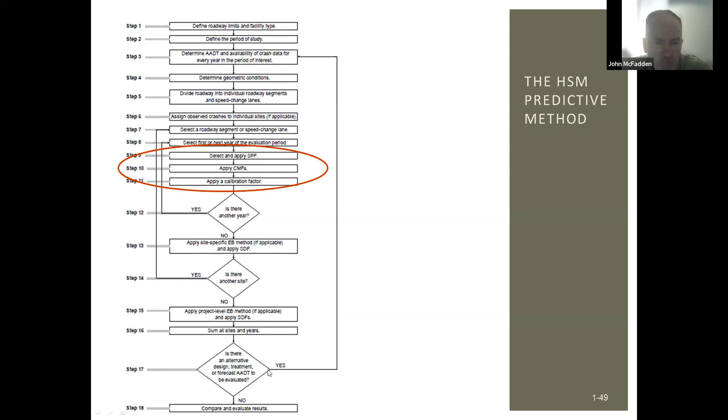Okay, so for our highway safety analysis, as we start to wrap up this first day here, we're setting this up, and tomorrow we'll jump into this and apply this to the example of I-70.

First, we identify the limits of our project and the facility type. We establish a study period. We need data, including ADT and crash data, hopefully, if it's available. If it's not, we can still use and apply the models for predictive purposes. And we need that broken up for intersections versus segments. We need our traffic control conditions as well as our geometric attributes: lane width, shoulder width and type, stop control, signalized lighting, and so on and so forth.

And then what we do, similar to the highway capacity manual, we separate our project into homogeneous sections, and we analyze each individual homogeneous segment together or individually, and then group them together as a whole by summing up the crashes on each individual segment. And then we also assign the observed crashes to these individual sites.

The HSM worksheets, and what I encourage you to do for homework before tomorrow is, if you go... let me escape out of here for a moment. And I'm going to segue back for a second to the highwaysafetymanual.org website.

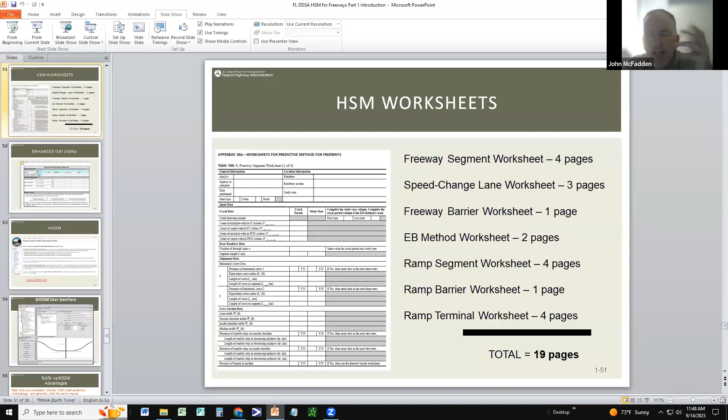I would encourage you to download and play around with all four of the spreadsheets. If you download each of these spreadsheets and open it up and start playing around with it, you'll get a feel and a flavor for what we're going to get into tomorrow.

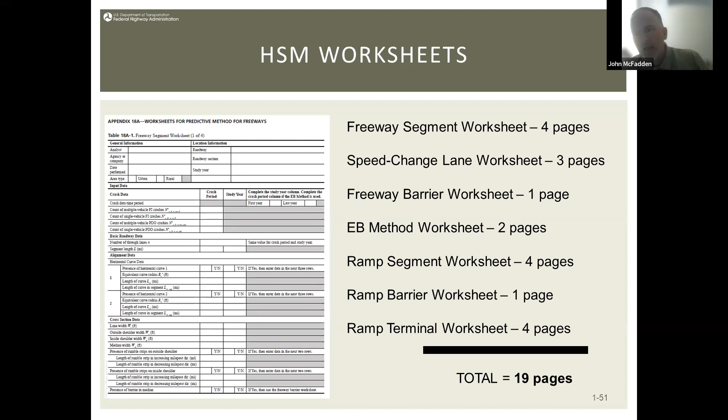So within this spreadsheet for ISAT-E, you'll notice there are 4 freeway segment pages, 3 speed-change lane worksheet pages, a page for freeway barrier worksheets. There's 2 for EB, 4 for ramp segments, 1 for ramp barriers, and 4 for ramp terminals. So there's 19 total worksheets that exist for our suite of freeway facility analytical elements.

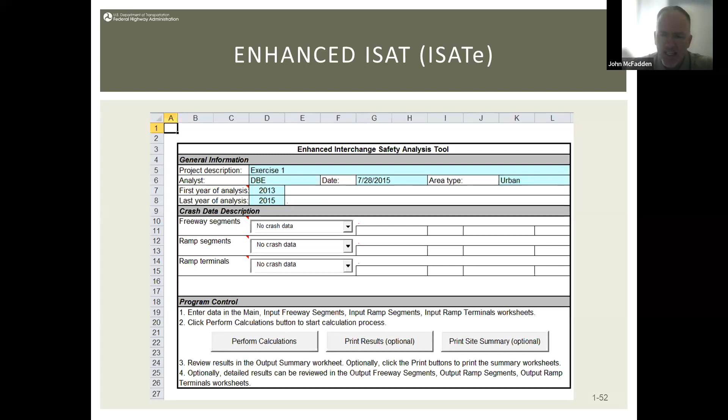So we'll dive into this a little bit more tomorrow, but to show you what the ISAT-E looks like, here's an image of the initial screen once you download it. This is the first worksheet, which gives you the basic project information elements. So you have general information related to the project, and then it also provides the crash data description that you're going to give this spreadsheet. And I'll get into that in a little more detail tomorrow.

A week from tomorrow, we will get into the IHSDM and how to apply these same concepts within the context of the IHSDM. And the IHSDM user interface is a little bit different, and the learning curve associated with that is a little bit steeper if you haven't been exposed to it.

Now, one question that often comes up: why would you use one versus another tool? Well, let me preface this by saying most of us, having no experience with IHSDM, have at some point in our life used Excel in a spreadsheet format. So initially, it's my expectation that the learning curve for ISAT-E is going to be much less steep than that for IHSDM. So it's more familiar, these Excel spreadsheets.

Another reason for ISAT-E, they explicitly show the CMFs for each of the attributes in the output summary, which gives you guidance as it relates to the impact of the design elements on safety. And it also familiarizes users with project attributes through that segmentation process.

On the flip side, why would we use IHSDM? Well, the benefit of IHSDM is if you're dealing with a CAD-based project, you can upload that very easily into IHSDM, and it will automatically segment the project for you. So for larger scale, larger scope projects that are digitized, there's a benefit to using IHSDM in terms of that segmentation, because it does take up time.

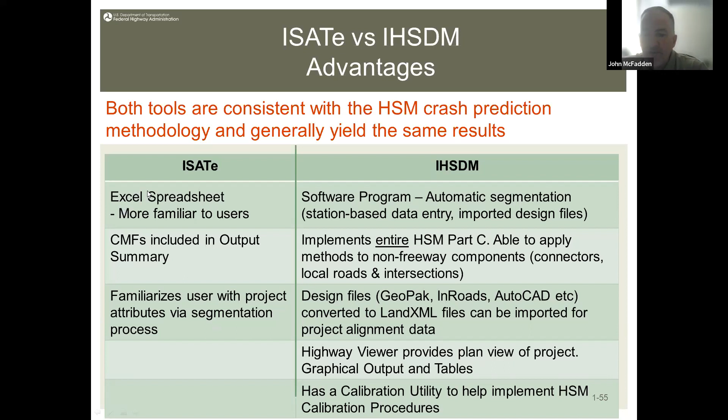Another benefit to the IHSDM are the files that can be uploaded. GeoPak, InRoads, CAD, anything converted to Land XML can be imported. The other benefit, the highway viewer in IHSDM provides a graphical display of the output and tables. And then finally, there's a calibration utility within the IHSDM that can help through the calibration process.

Both approaches should deliver the same result—a consistent deployment of the HSM crash prediction methodology. The ISAT-E requires Excel spreadsheets for non-freeway components. The facility segmentation we do manually for our ISAT-E, and all input values are entered manually.

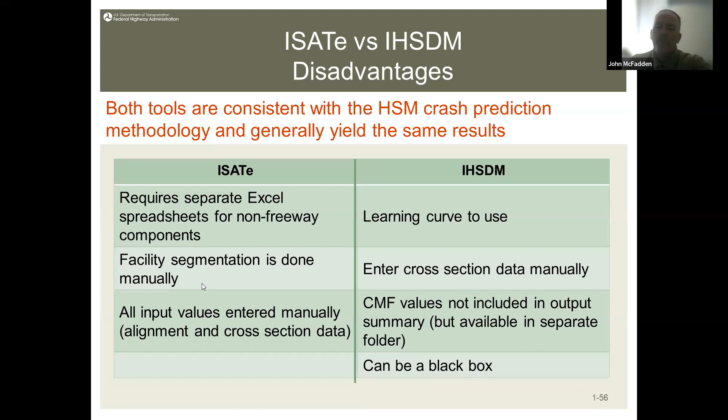For IHSDM, there's a steeper learning curve. The entire cross-section data is entered manually. CMF values are not included in the output, and it can be perceived by some users as a black box where you're not seeing what's going on behind the scenes.

Then we have ISAT-E to deal with freeways, ramps, and ramp junctions. So we can do the spreadsheets for all the facility types, but they're going to be differing spreadsheets. If you cross over from one facility type to another, you're going to have to download a separate spreadsheet and do it independently, the analysis. Whereas in IHSDM, soup to nuts, across different facility types, they can all be done, but there's a much steeper learning curve.

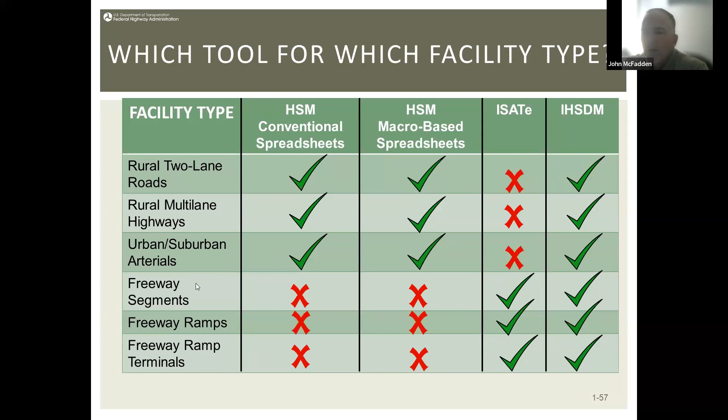Okay, that concludes the first session, and I've got about 4 to 5 minutes of Q&A here. If there's any comments, let me check to see. So Marilyn Sikot Husan is wondering if there's a CMF available for reversible lane or transit lane for arterials. If we don't find the CMF in the clearinghouse and don't have time or budget for developing a CMF, what would be your suggestion regarding the CMF?

Okay, great question. And I mean, not even just for this application here, reversible lanes—I'm not familiar with the current procedures in the HSM being able to deal with reversible lanes. I haven't checked this clearinghouse yet to see that, but let me do that now while we're here. If I segue over, I'll go to the clearinghouse. Let me share my screen again.

And at the clearinghouse, what I typically do would be search freeway reversible lane. And I don't see anything there. Let me also suggest here, at least for today, in closing out today's workshop, Part D is the CMF clearinghouse. This is a warehouse of CMFs that have been developed independent of the Part C methods. And if I go back and show you today, how many CMFs are there? If I just click search with nothing in there, you'll see, there are 8,383 CMFs in the clearinghouse today.